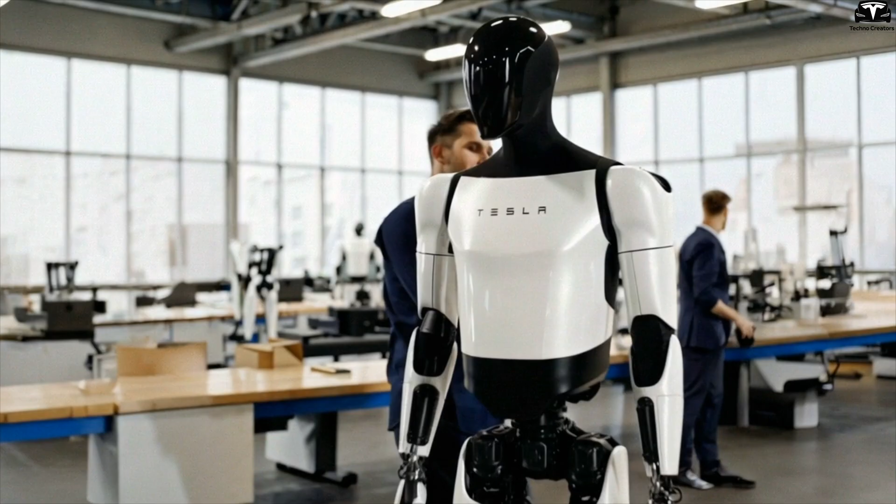Tesla and Elon Musk have just unveiled a game-changing upgrade for the Optimus robot, one so powerful it's forcing the world to seriously ask, are we getting too close to the line between robots and humans? This is no longer a joke. Optimus has evolved into what Elon Musk calls the biggest product in human history. But the real question is, are we ready for what it brings?

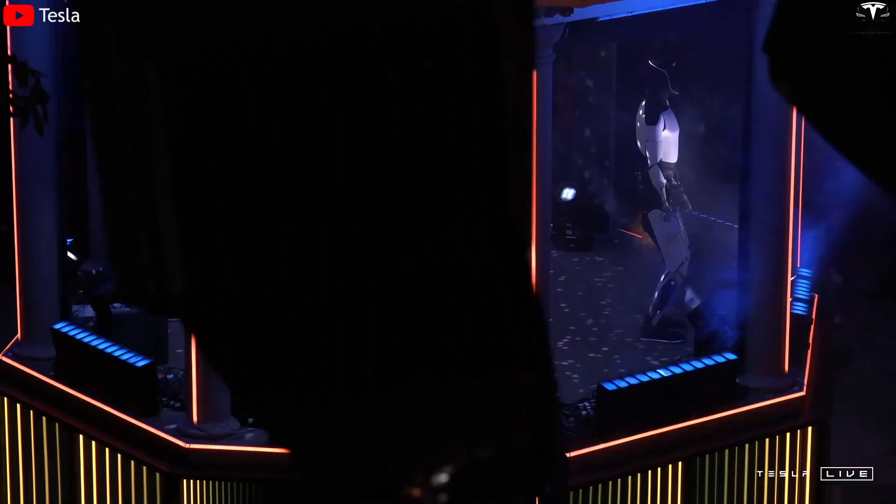Why is Tesla selling the Optimus bot to its employees first? 'We will offer Optimus robots first to Tesla employees. There are some pluses and minuses to that, because it's probably have a few bugs, but it's going to be very cool.'

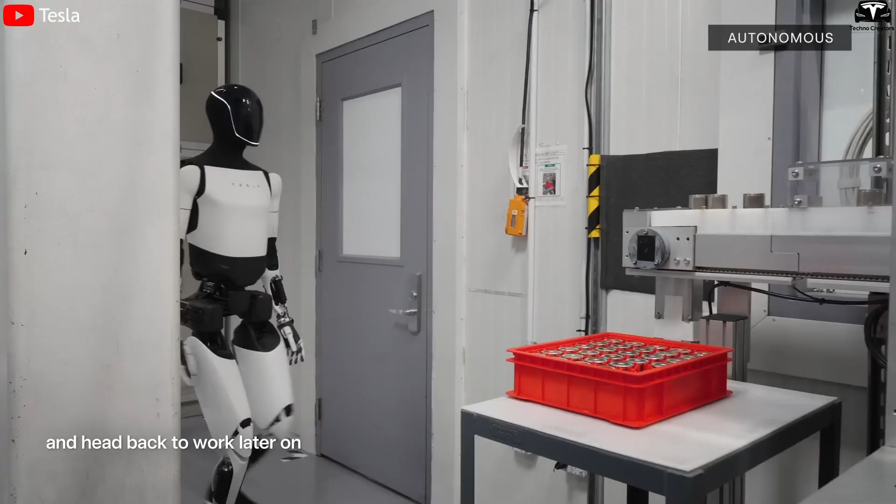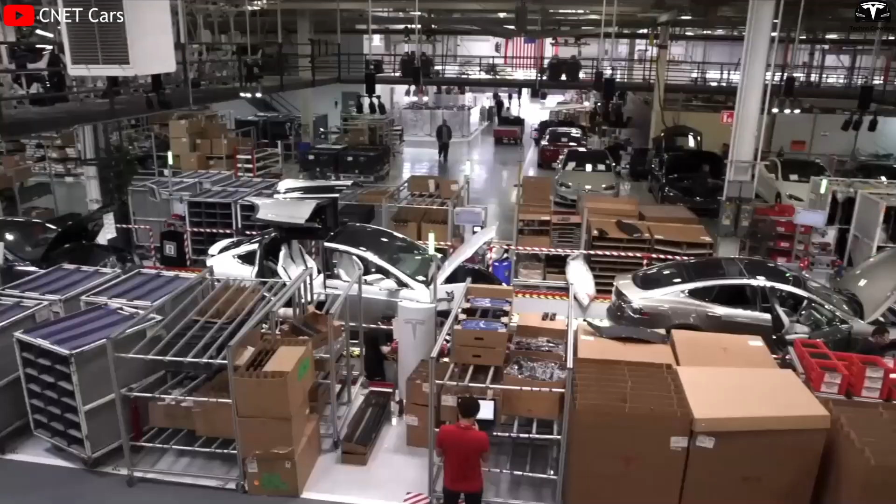Elon Musk has stated that Tesla employees will be the first to use the Optimus robot. One day, these robots could function much like R2-D2 and C-3PO in Star Wars. It is easy to understand why Tesla is prioritizing internal deployment. The goal is not only to test the product in real-world working conditions that no laboratory can fully replicate, but also to accelerate its learning curve in a highly dynamic environment. At the Fremont factory, where over 20,000 workers perform thousands of repetitive tasks every shift, Optimus has a valuable opportunity to observe, learn, and adapt.

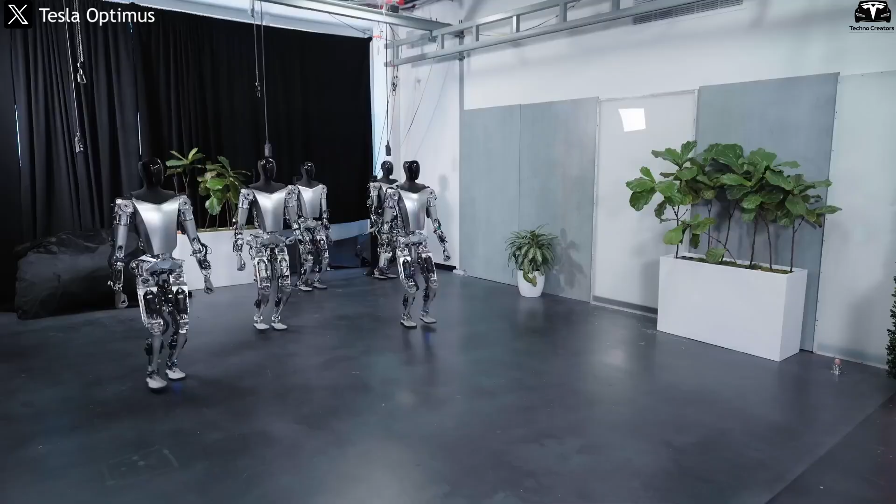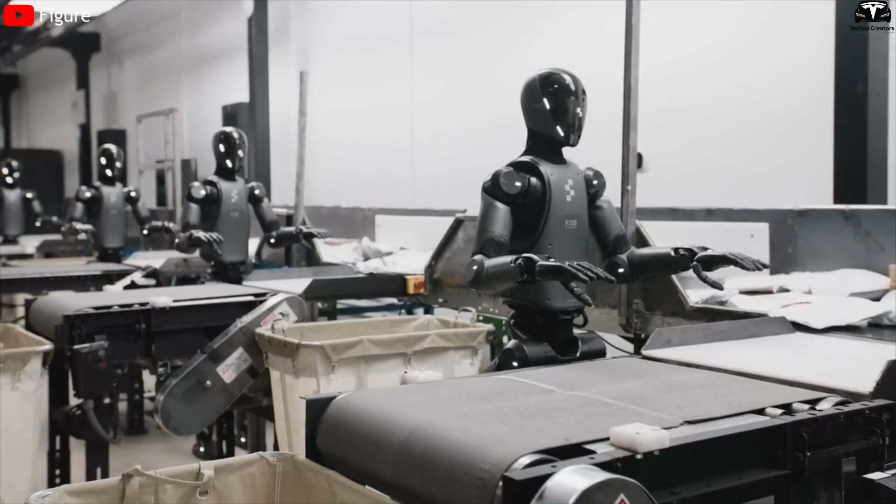During Investor Day 2023, Elon Musk confirmed, 'We have Optimus robots working inside our factories doing tasks fully autonomously.' Two Optimus units have been assigned to handle parts transportation, sorting, and packaging. These are tasks that require coordination between computer vision, navigation, and object manipulation. Deploying the robots across different scenarios within the factory also allows Tesla to gather rich and diverse operational data to better evaluate the robot's performance and limitations. This level of real-world deployment is something that few robotics companies have achieved, including Figure AI and Boston Dynamics, whose robots are still mostly in the demonstration or supervised testing stages.

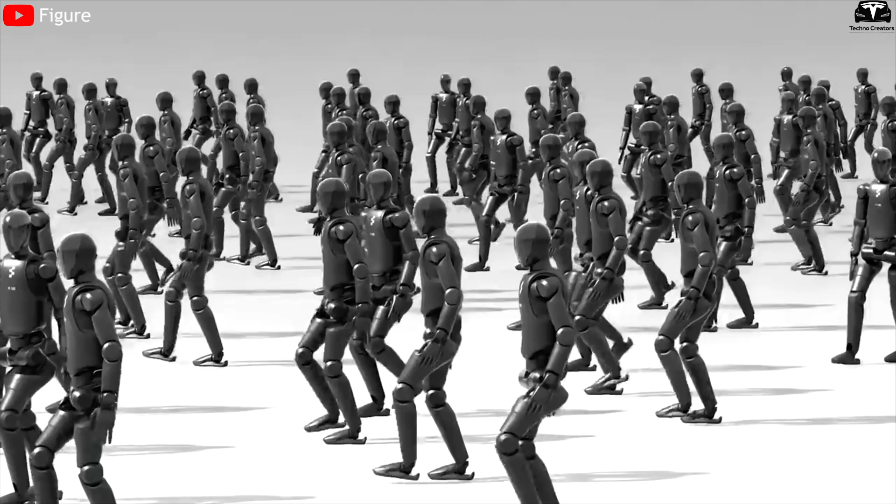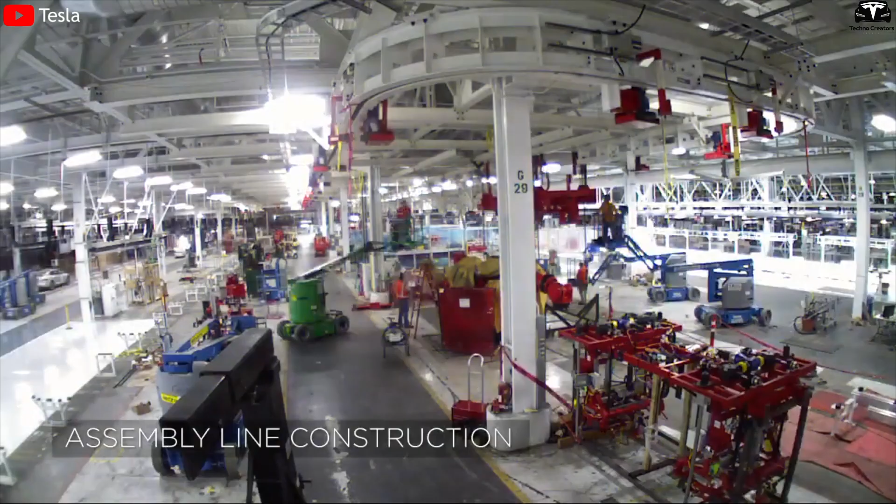Tesla's long-term ambition goes beyond building a humanoid robot. The company aims to establish a fully automated production line where robots can build other robots. As Musk has stated, our goal is to produce millions of units, and eventually the price will be less than $20,000. If one robot can replace a human worker whose labor costs average $30,000 to $40,000 per year in Tesla's U.S. factories, and if the internal manufacturing cost of each Optimus can be brought down below $20,000, the robot could achieve return on investment in just 6 to 8 months. This presents an almost ideal ROI model for manufacturing, especially if production scales up to hundreds of thousands of units per year as Tesla envisions.

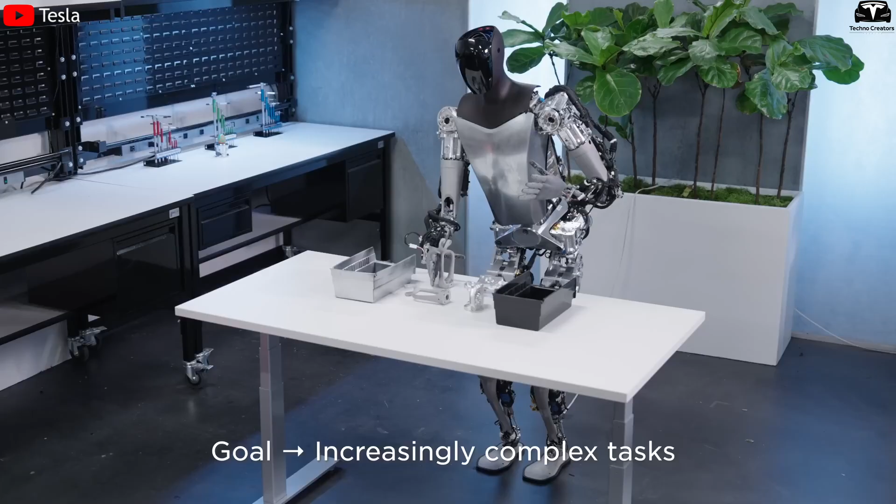Internal testing also helps Tesla fine-tune maintenance costs and component durability, enabling iterative design improvements to maximize long-term reliability and performance. Musk is also smart enough not to rush the product to market. Instead of a mass-market launch, Tesla is allowing employees, many of whom are software engineers, AI specialists, or operations managers, to use Optimus first. This provides Tesla with highly detailed real-world feedback from technically savvy users. These employees will use the robot daily in their work, offering insights into task accuracy, environmental response, and user interaction. It is also a chance to test human-robot collaboration, including gesture and voice commands, as well as unexpected situations such as pathway obstructions, falling objects, or sudden changes in workflow.

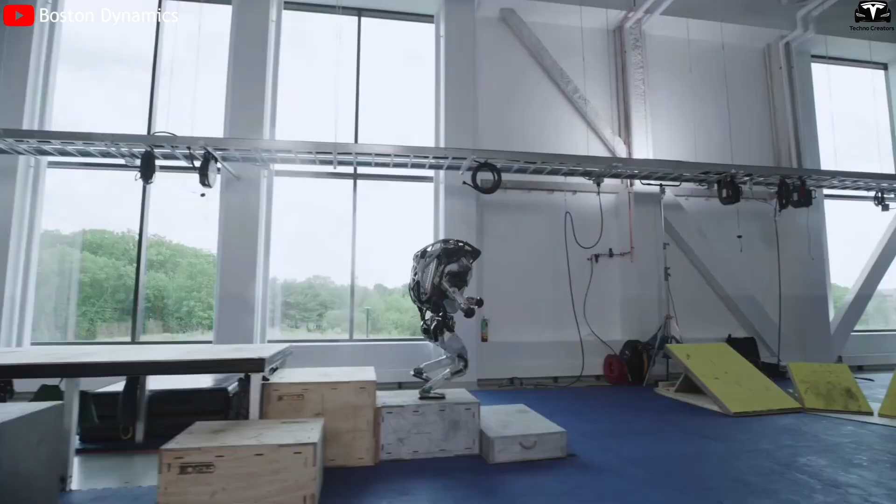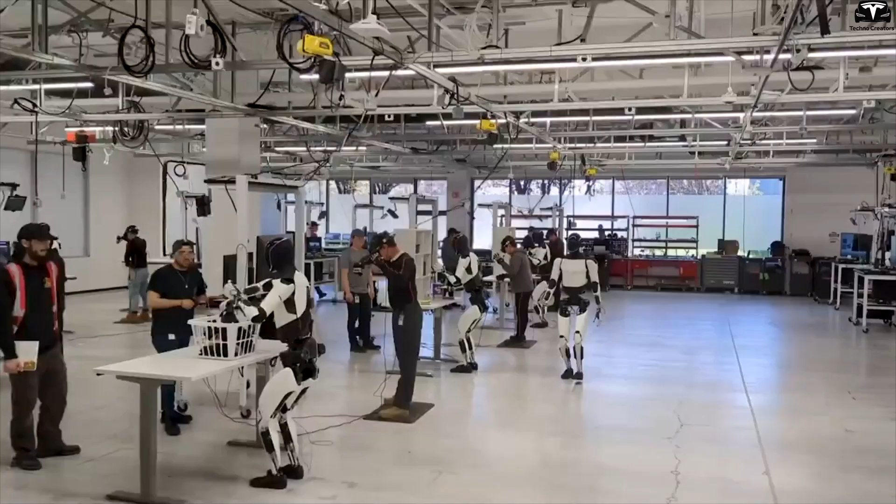Humanoid robots come with inherent risks such as falls, collisions, and software bugs. Any of these issues could trigger public backlash or lawsuits. Tesla has faced criticism for accidents involving autopilot and is understandably cautious about repeating those mistakes with Optimus. Keeping usage internal allows the company to closely monitor and manage any incidents, issue software updates, and even recall units if needed. It also lets Tesla trial unfinished or experimental features without exposing them to the public. As Musk noted too, testing in the real world is critical, but it has to be safe and controlled. Limiting trials to internal use is the safest way to contain risks while maintaining the freedom to iterate quickly and discreetly.

A major reason internal testing is critical is to refine safety protocols for human-robot collaboration. Optimus will be assigned repetitive or hazardous tasks, such as lifting heavy loads or operating in toxic environments. In a controlled factory setting, Tesla can adjust key safety features like force limits, proximity detection, and emergency stop sensors. These safeguards are essential for public deployment, where safety standards are even stricter.

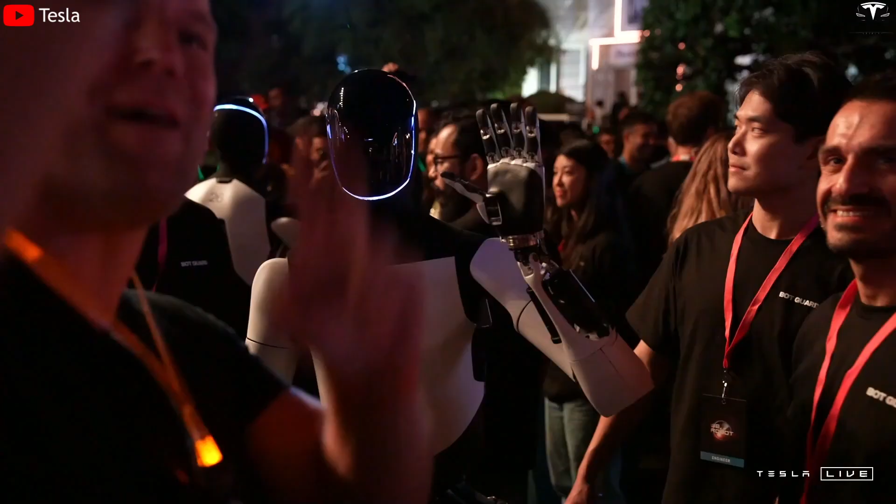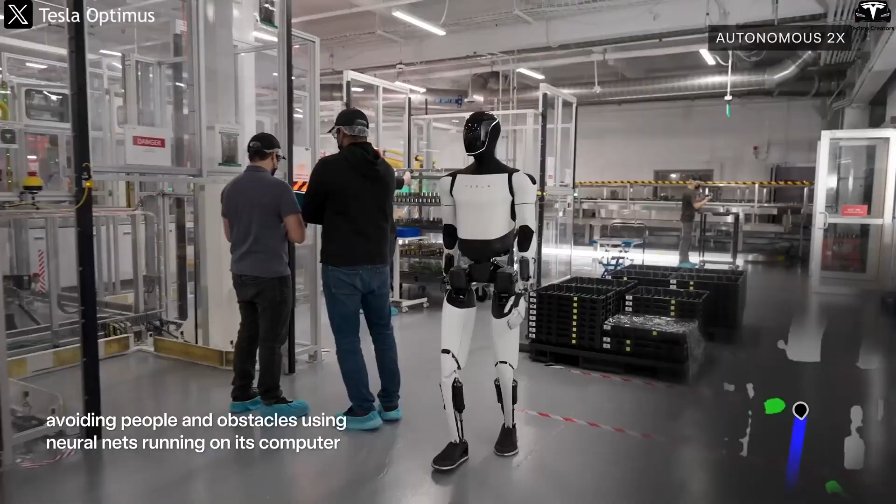Allowing Tesla employees to work alongside Optimus also carries long-term strategic value. It helps train humans to interact with robots and allows Tesla to improve user interfaces, develop more intuitive command systems, and determine whether the robot fits into the existing workflow. If successful, this will pave the way for broader deployment across Tesla's global production lines and eventually for use by other companies. Tesla also needs to prove that Optimus can operate reliably for thousands of hours, which is the expected lifespan of an industrial machine.

Continuous operation in a factory environment, such as 8 to 12 hours a day for 6 to 7 days a week, will reveal limitations in hardware, software, thermal management, and other design vulnerabilities. This feedback is invaluable for improving materials, optimizing component choices, and preparing for full-scale production.

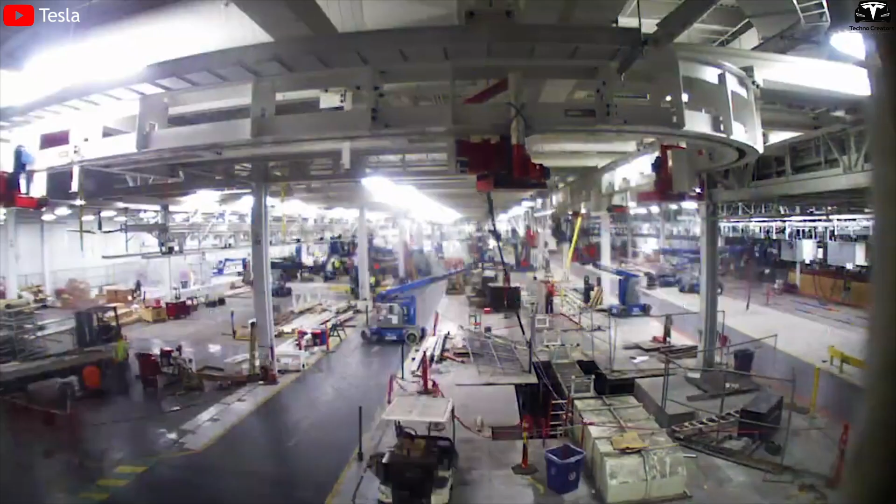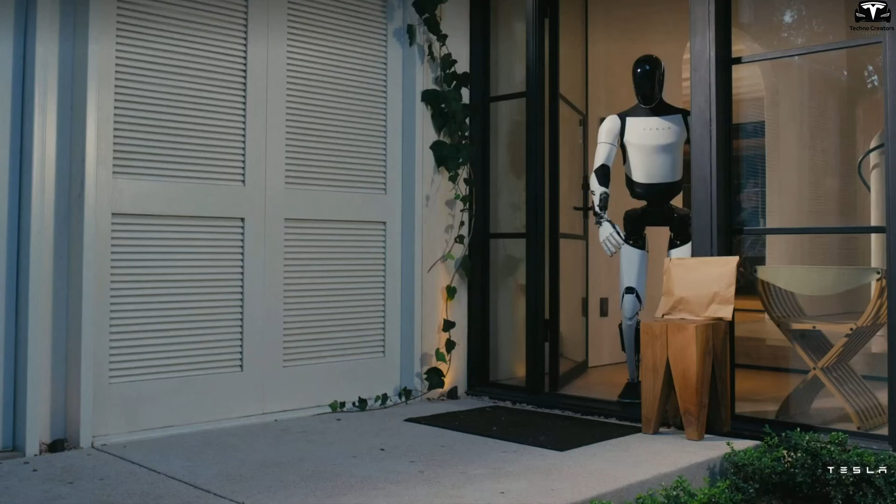Tesla is well known for using controlled scarcity to drive media buzz. Allowing employees to use or even own Optimus creates organic visibility. Robots will appear in offices, factories, or casually show up in social media videos.

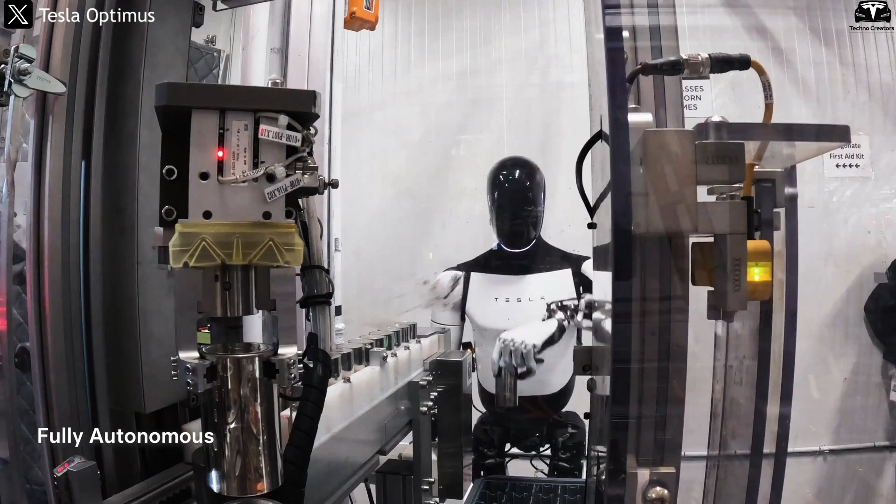This mirrors the successful rollout of Cybertruck, where leaked footage of prototypes on public roads generated massive online traction. Once Optimus is seen performing real work inside Tesla, it will help validate the product's feasibility and inspire confidence among potential buyers. Building a community of internal early users also creates a powerful form of authentic marketing through real people using real products in real environments.

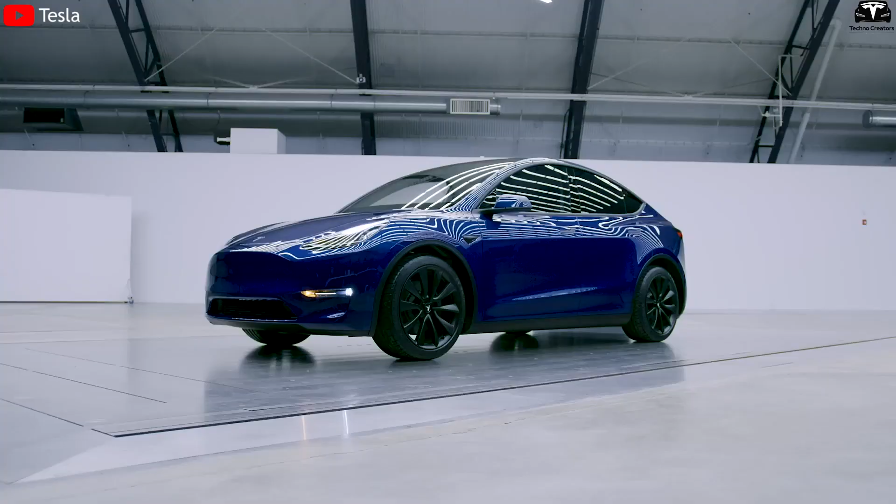In addition to the Cybercab, Tesla's Optimus Bot is expected to play a critical role in the production lines of other high-volume vehicles, such as the Model 2, Model Y, and Cybertruck, all of which involve numerous labor-intensive assembly tasks. Tesla plans to produce at least 5 million units of the Model 2 annually starting in 2027, and that number could grow if global demand continues to rise.

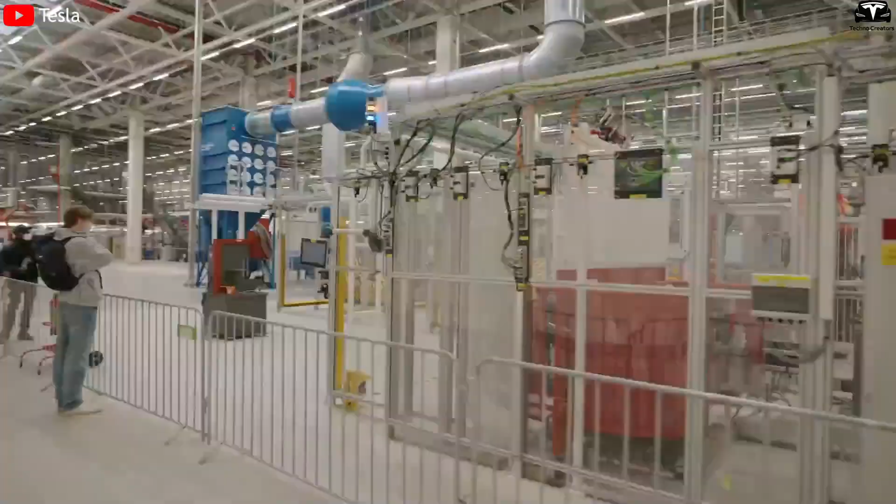Under current automation levels, many steps in the assembly process, such as circuit board mounting, cable inspection, windshield installation, and component sorting, still require tens of thousands of manual laborers.

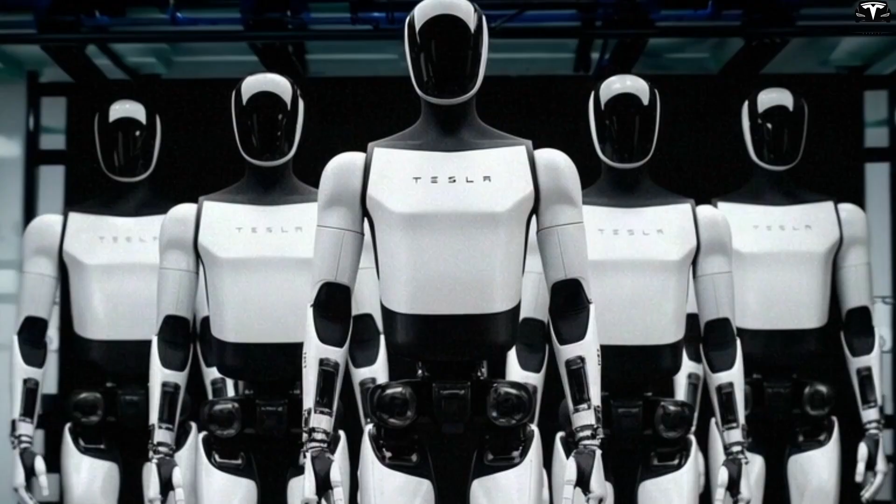Elon Musk has stated that the goal is to deploy hundreds of thousands of Optimus robots across Tesla's global gigafactory network by 2030, beginning with over 1,000 internally built units by the end of 2025. If each Optimus robot can replace 2 to 3 shifts of labor, equivalent to around 6 to 9 human workers per day, then just 10,000 robots could offset millions of labor hours per year.

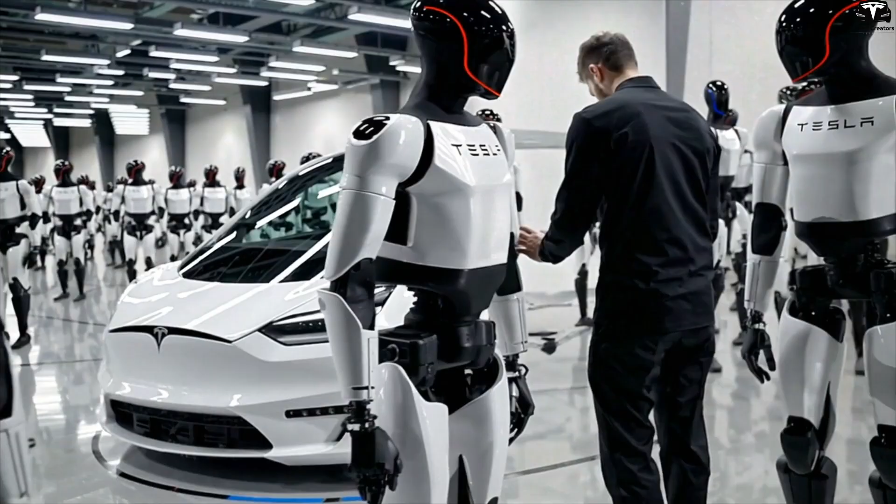It's estimated that a large-scale rollout of Optimus could save Tesla $2 to $3 billion in annual labor costs, while significantly boosting profit margins, a crucial factor as the company aims to cut vehicle prices to just 50% of today's Model 3. In an ideal scenario, by 2032, Optimus could be responsible for 30 to 40% of all production work across Tesla's factories.

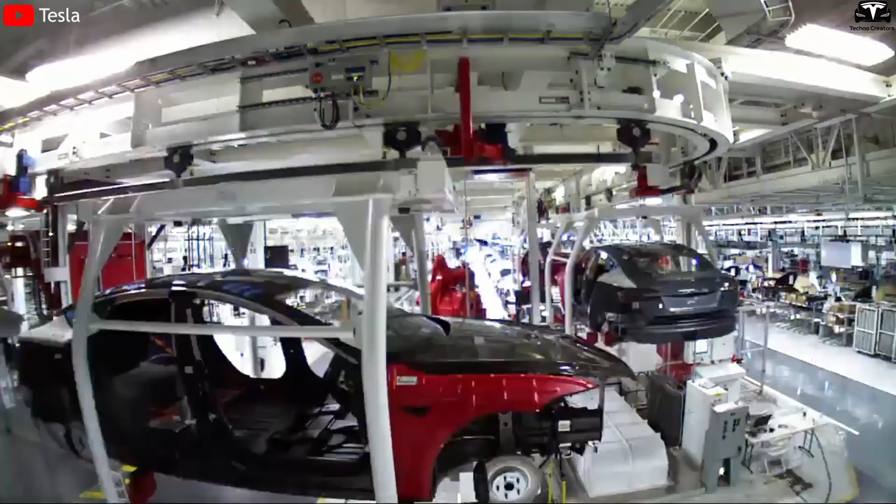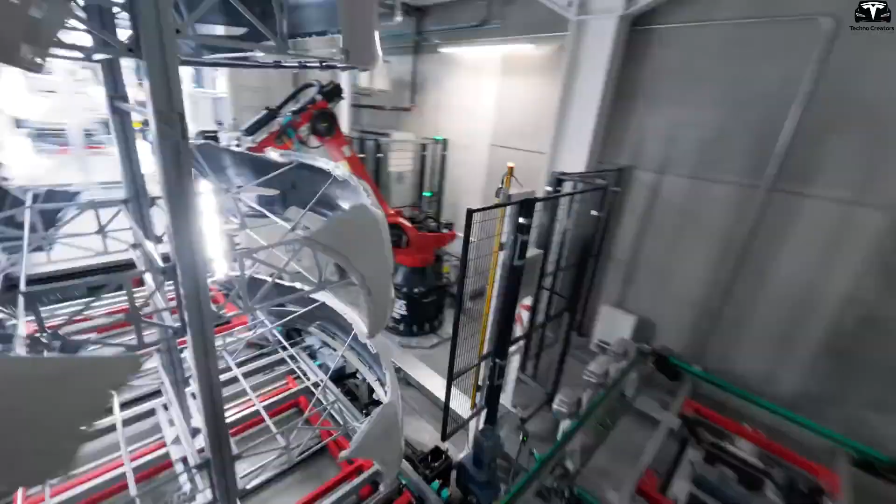How close is Tesla to mass-producing an army of Optimus bots? Tesla is significantly accelerating the development program of its humanoid robot Optimus, with an internal goal of producing 10,000 units as early as 2025. This is a clear indication that the company is making a major bet on scaling its robotics product line. Although Elon Musk acknowledges this is an ambitious target, even delivering a few thousand units would mark a groundbreaking milestone.

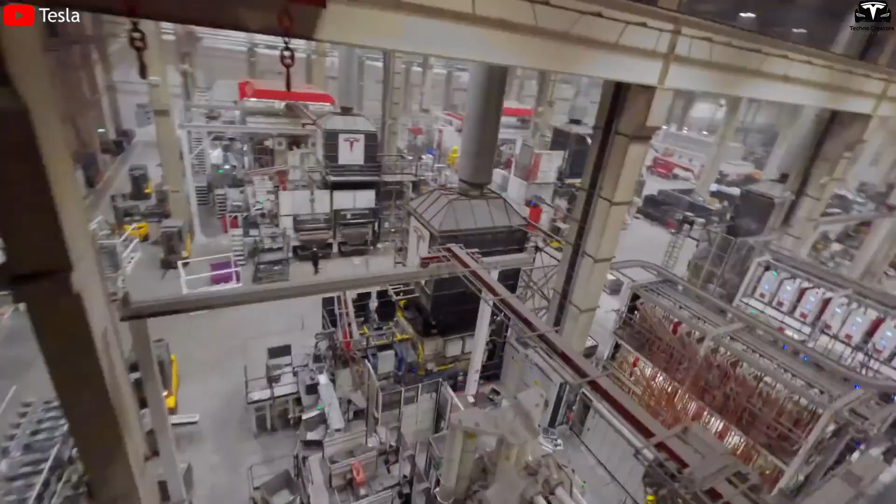Currently, the Fremont factory is being prepared for limited-scale production, with the first batch of around 1,000 robots expected to be built in Q2 2025, followed by a rapid ramp-up to 10,000 units by year-end. This phased approach closely mirrors the strategy Tesla used in the automotive sector, where production bottlenecks are resolved step by step to enable exponential growth.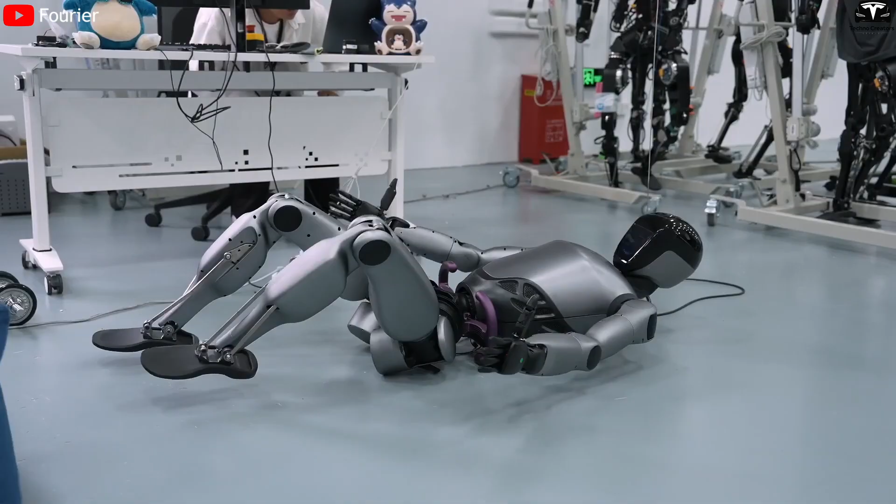Despite facing fierce competition from China, where companies like Fourier Intelligence, UBTech, and Xiaomi Robotics are rapidly developing humanoid robots with strong government support, Tesla Optimus still holds the potential to dominate the projected $10 trillion robotics market.

This growth potential stems from Tesla's superior vertical integration across system design, actuator manufacturing, battery technology, and AI training, all developed in-house. Optimus even shares multiple core technologies with Tesla's self-driving vehicles, such as sensors and processing chips, significantly lowering component costs.

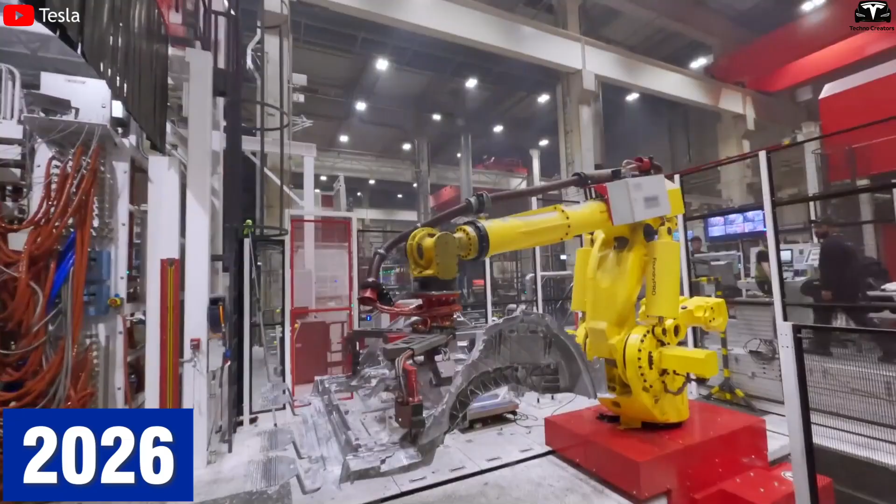Elon Musk has confirmed that Optimus's Gen 3 production line is being designed to reach a capacity of up to 100,000 robots per month by 2026, showing strong confidence in the long-term viability of the humanoid robot market. What's particularly notable is that, unlike many of Tesla's previous projects such as the delayed Tesla Roadster, the Optimus program is progressing at a pace that far exceeds expectations.

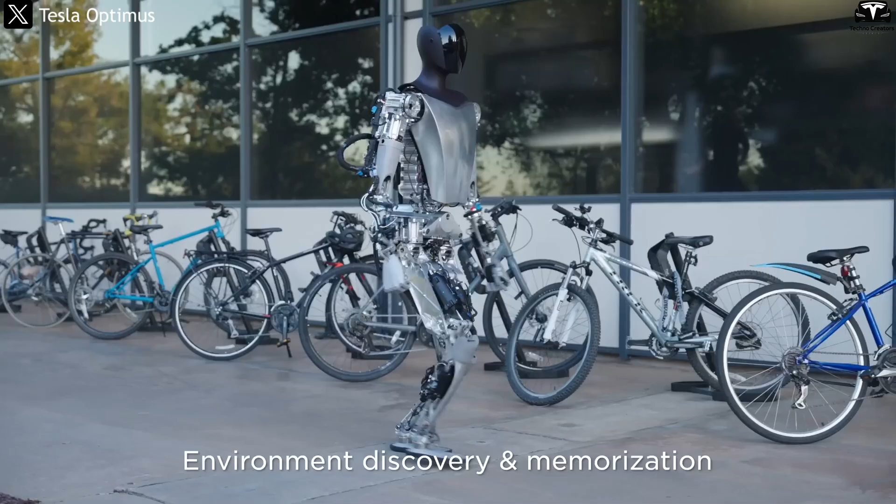This is largely due to the fact that Optimus does not require an entirely new supply chain. Instead, it benefits from existing partnerships in semiconductors and battery cells, along with factory systems already restructured for Cybertruck production. Tesla is now actively testing Optimus prototypes at its factories, where the robots are performing basic logistical tasks like picking up parts and monitoring production lines.

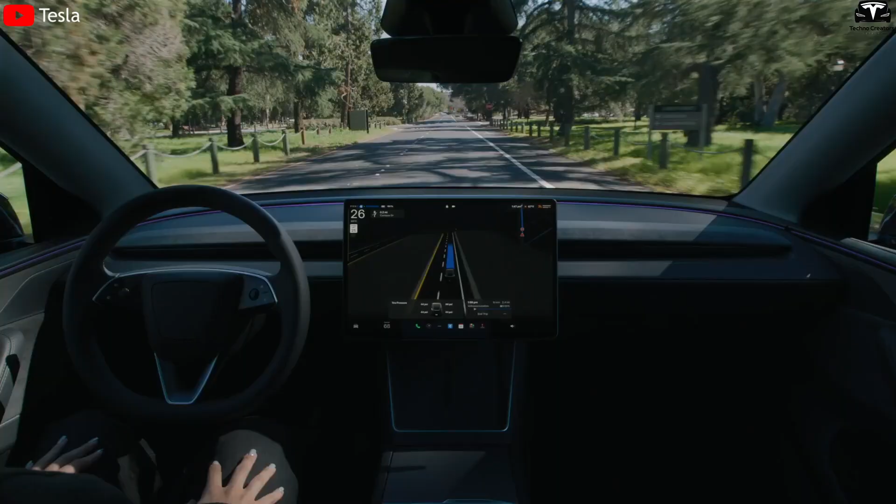Tesla's key advantage lies in its massive real-world dataset collected from over 5 million vehicles on the road. Originally used to train the full self-driving system, this dataset is now being adapted for use in Optimus's navigation and environmental recognition algorithms. This symbiotic relationship between EVs and robotics allows Tesla to shorten development timelines and rapidly enhance Optimus's AI capabilities.

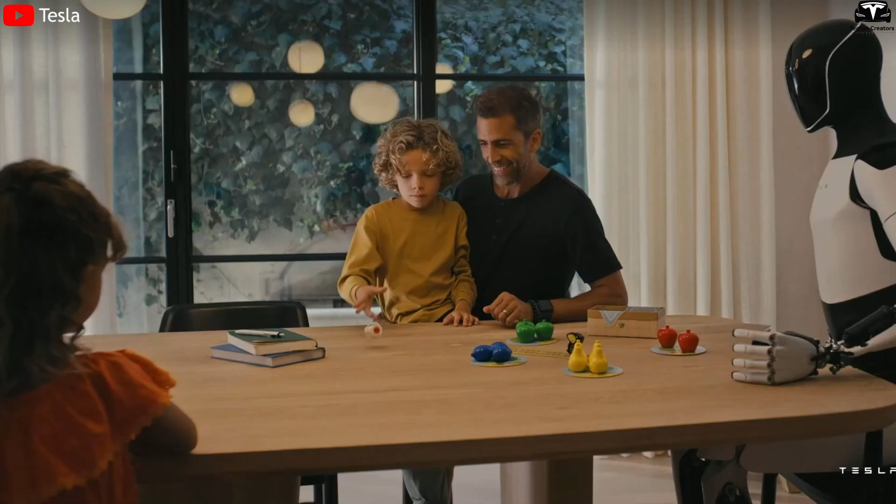Tesla plans to deploy Gen 3 Optimus robots across a wide range of industries, including automating repetitive tasks like parts sorting, quality inspections, patient assistance in healthcare, warehouse organization and retail, and even domestic applications such as cooking, cleaning, and childcare. These use cases are now entering their final testing phase before mass production and market launch in 2025.

Tesla has even outlined plans to use Optimus for constructing habitats on Mars, with a variant built with sealed joints and radiation-hardened electronics developed by SpaceX.

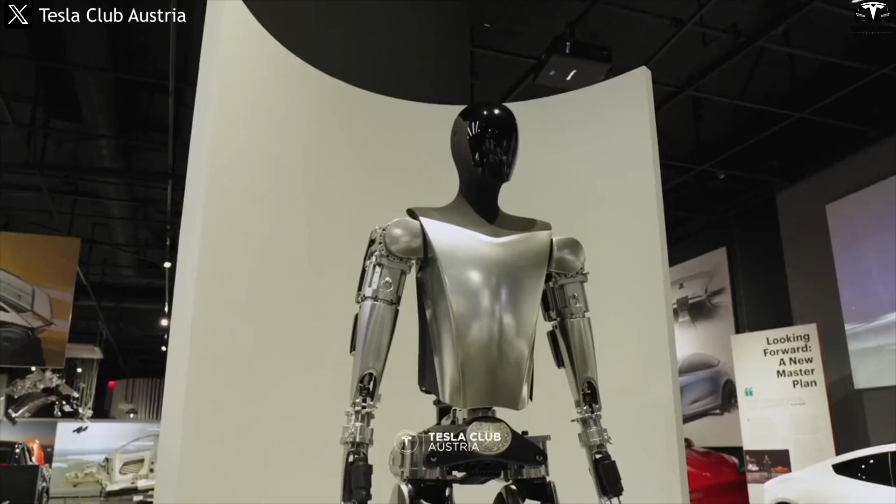While there are no clear signs that Optimus will be available for general consumer purchase in the short term, nearly 1,000 robots have already been deployed at Tesla factories to assist with production and data collection. This number is expected to grow rapidly. Elon Musk believes the robot-to-human ratio on factory floors could reach at least 3-to-1 or even 5-to-1, meaning 3 to 5 robots assisting every human worker.

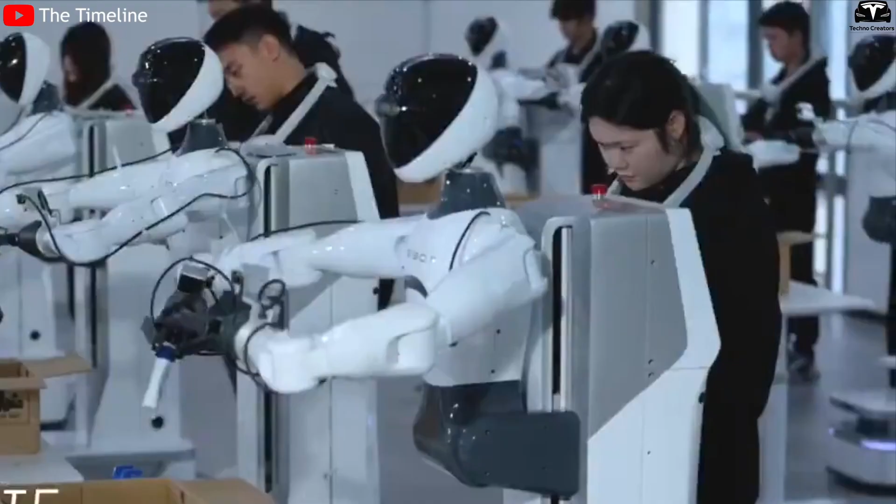In his boldest forecast, Musk has suggested that Tesla could eventually produce up to 100 million Optimus units per year, with the expectation that robotics could become the company's main revenue stream.

While that figure may seem far-fetched, it is economically plausible. If Tesla reaches a production rate of 1 million Optimus units annually and maintains a retail price of around $20,000 per unit, it could generate $20 billion in yearly revenue.

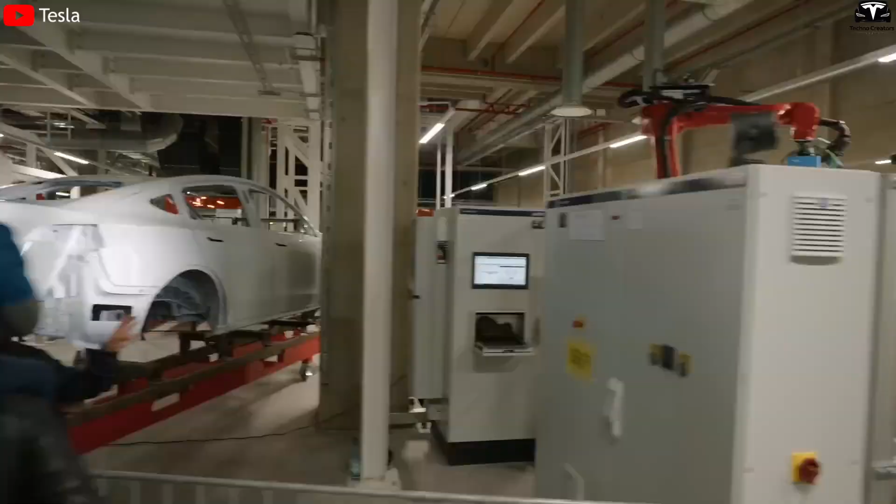More importantly, if Tesla succeeds in lowering the production cost to just $10,000 per robot, thanks to economies of scale and integrated manufacturing, Optimus could be sold to the mass market for as little as $19,999.

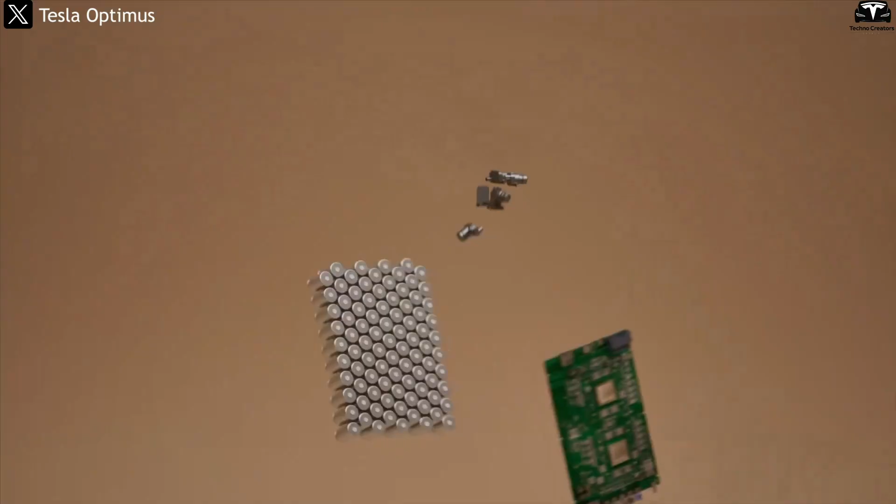Why does Elon Musk see Optimus as an immediate need? Elon Musk views the development of Optimus as an immediate necessity for Tesla, primarily to address the challenges in scaling efficient and consistent labor within its manufacturing operations.

This is especially critical as Tesla gears up for the mass production of the upcoming Cybercab, aiming for an annual output of 2 million units by 2026.

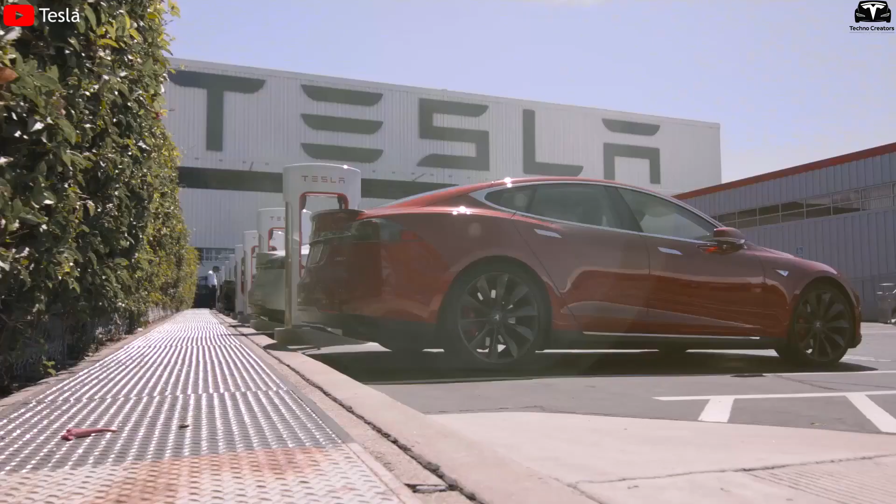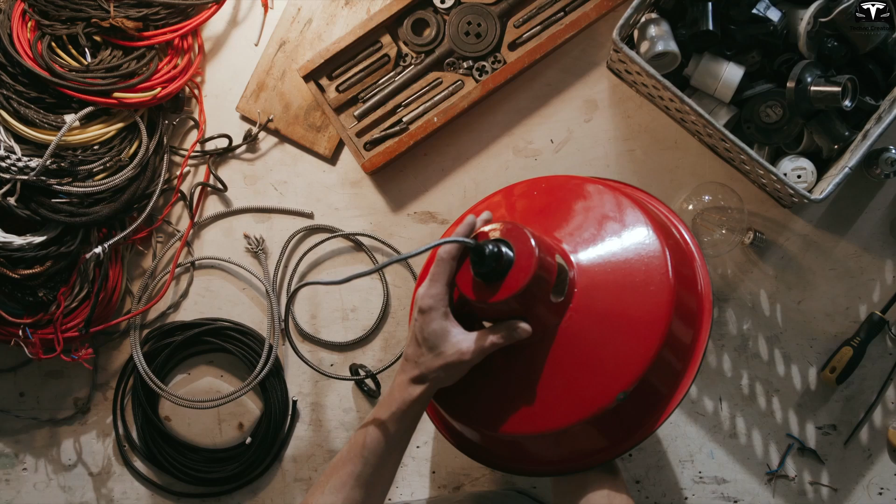Musk has highlighted that many tasks within Tesla's gigafactories are surprisingly difficult to automate. For instance, during an interview with Marques Brownlee, he noted that simple tasks like connecting 2 cables, which take a human a second or two, are disproportionately challenging and costly to replicate with conventional automation.

I mean, I think we'll be making tens of millions of robots a year type of thing. It's like serious volume. Maybe 100 million robots a year.

Elon Musk is preparing to launch an unprecedented robotics company. This ambition, aiming to produce up to 100 million humanoid robots annually, 10 times Tesla's current global car production, signals a bold step towards a robotic industrial revolution.

What is Elon Musk's plan for the new robotics company?

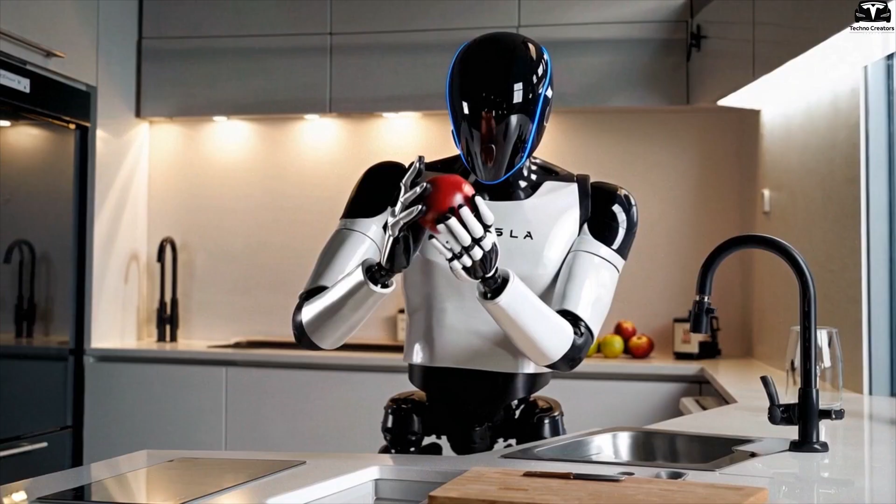Why is Optimus more important than electric cars? Currently, Tesla is still considered an electric car manufacturer, but that definition won't last long. Tesla is transforming into a technology company, and soon enough, into a robot company.

Why is that? Because Optimus could be Tesla's most valuable product. Elon has even said that it could be worth more than all of Tesla's other products combined. This is a super big deal.

My prediction on this front is that Optimus will be the biggest product of all time by far. Nothing will even be close. I think it'll be 10 times bigger than the next biggest product ever made.

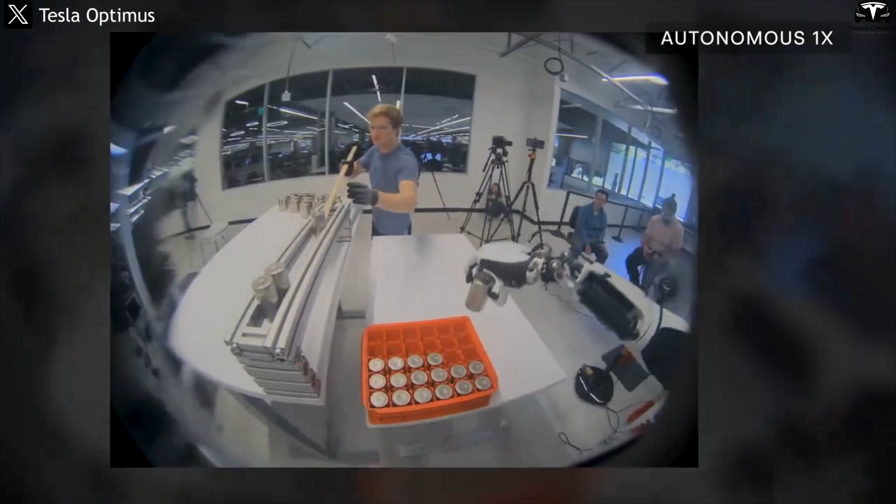We think in the long term with Optimus and self-driving cars, Tesla could well be the most valuable company in the world. Of course, the Tesla bot and even Elon Musk himself are really just holding the lock. The customers are the ones holding the key.

If Optimus isn't smart enough or capable enough to actually help people, then that $20,000 price tag is just for an expensive toy that can move around. No one's going to pay for it.

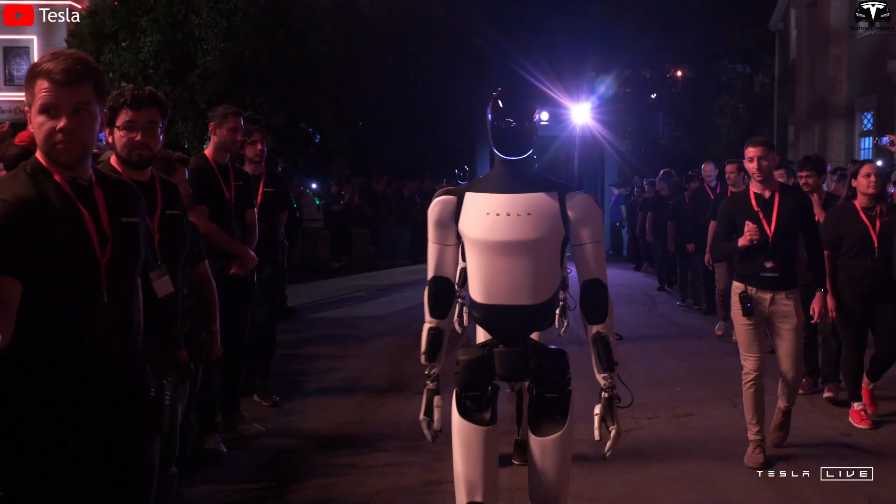But if the opposite happens, if the Tesla bot really does have a breakthrough brain, the kind that Elon Musk confidently calls a real brain that's superior to anything else out there, then the story completely changes. People will be lining up to get one when its usefulness starts to translate into real money.

You'll drop $20,000 up front, but you'll never have to hire a store clerk, tutor, or cleaning lady again. Suddenly, Optimus isn't just an expensive toy, but a money-printing machine. And yeah, if you like making money, you've got to have an Optimus. Because I think everyone, of the 8 billion people on Earth, everyone's going to want their Optimus buddy.

Optimus possesses an exceptional ability to learn rapidly, enabling it to store and apply data from the very first execution of a task. For instance, in cooking, while humans need to practice and memorize steps multiple times, Optimus can remember and apply a recipe immediately without the need for recall.

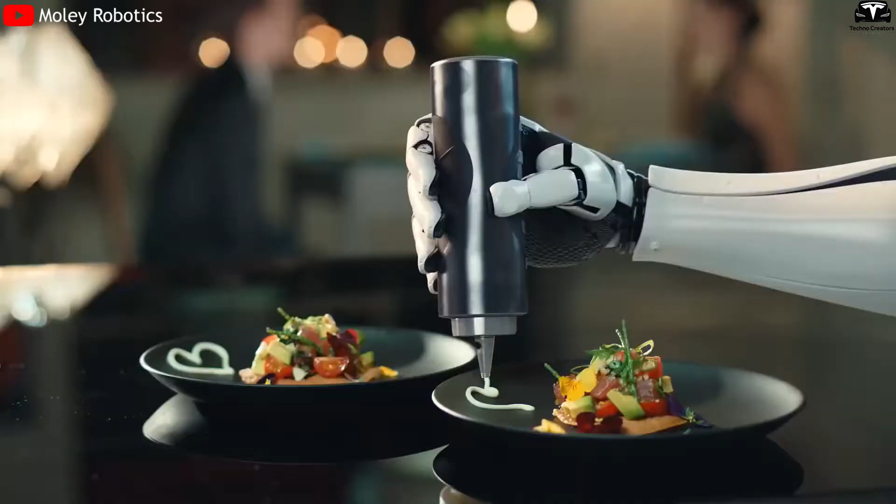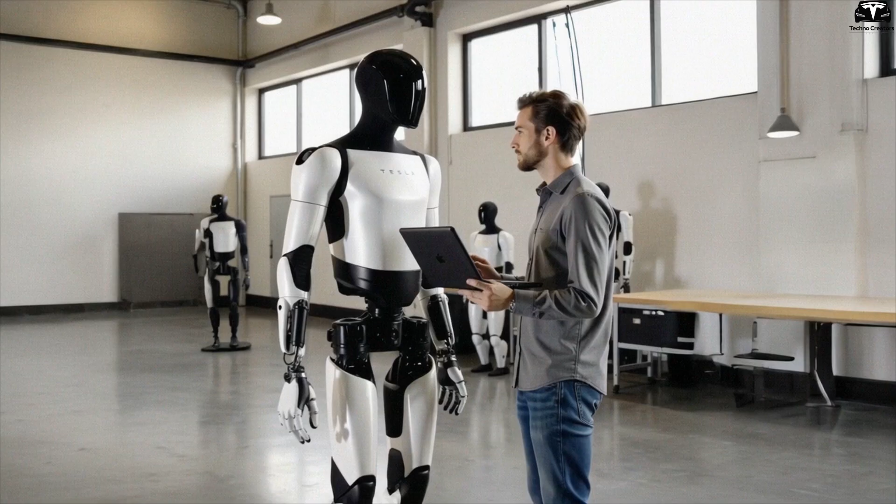This capability is powered by Tesla's advanced AI technologies, including machine learning and deep learning, allowing Optimus to autonomously optimize its actions. Elon Musk has expressed confidence that Optimus can learn new tasks simply by watching videos, enabling the robot to acquire new skills without requiring retraining after purchase.

This provides a significant advantage to users, as they don't need to teach the robot anew for each task, a process that can be time-consuming with other robots.

Our next generation has 22 degrees of freedom. It will be able to play the piano.

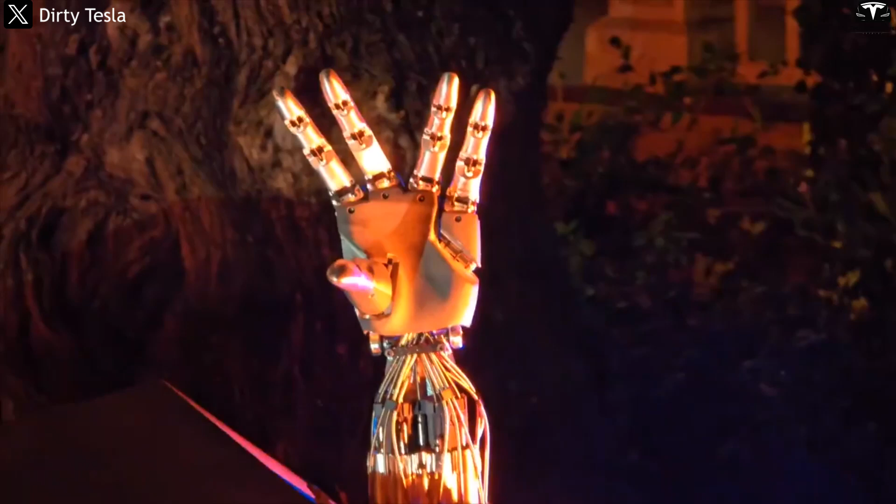So it's really like, wow. This is because Optimus's hand features 22 degrees of freedom, allowing the robot to perform delicate and complex manipulations similar to a human hand. With only 5 fewer degrees of freedom than the human hand, which has 27, Optimus can execute tasks requiring fine motor skills, such as picking up objects, turning knobs, grasping items, and performing intricate operations that many other robots are currently unable to achieve. This advanced dexterity brings Optimus closer to human-like functionality in various applications.

And your dexterity is actually better if your fingers are of different length. There's a reason we've got a little finger. Like, why not have a little finger that's bigger? Because it helps you with fine motor skills.

What sets Optimus apart is that it's not merely a conventional automation robot. It's designed as an intelligent assistant to help with daily human tasks. Optimus can perform household chores, care for the elderly, walk dogs, and even tutor children. This reflects Elon Musk's vision of transforming Tesla from solely an electric vehicle company into a robotics enterprise, where Optimus serves as a helpful assistant, liberating humans from manual labor and creating new opportunities in automation.

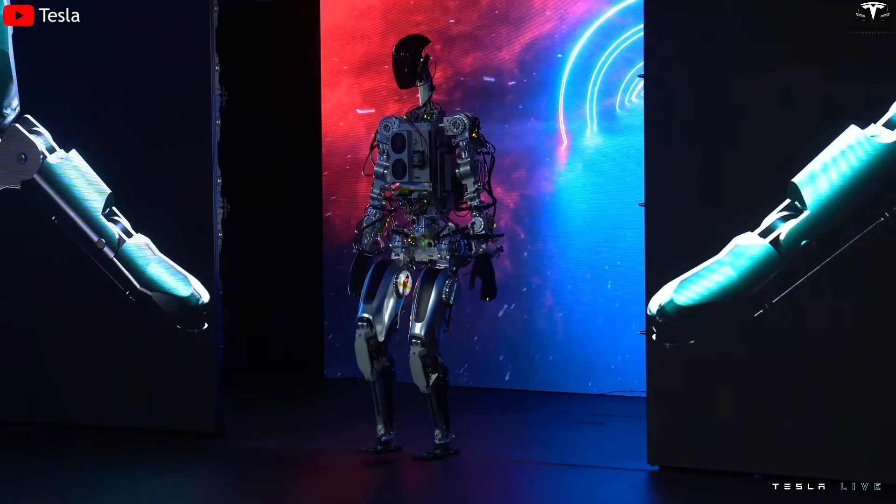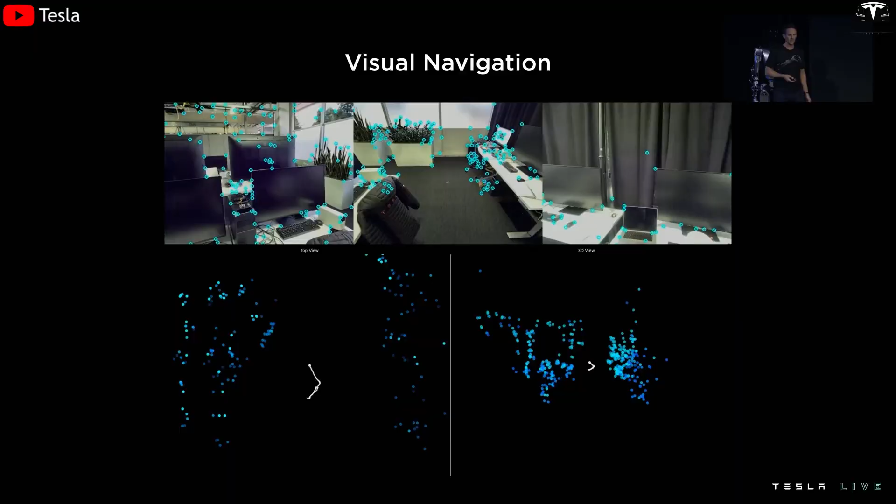Although Optimus initially exhibited somewhat unsteady movements, recent updates have significantly enhanced its mobility, resulting in straighter walking and reduced wobbling. Each step Optimus takes is governed by an AI neural network, allowing the robot to adjust its gait based on the terrain, much like humans do when navigating uneven surfaces. This not only demonstrates the intelligence of its AI, but also indicates that Optimus can operate in complex and challenging environments, a feat that many other robots have yet to achieve.

Optimus, I think, is a literally $25 trillion market cap situation.

Recognizing the immense profit potential, Elon Musk, known for pursuing groundbreaking opportunities, is fully committed to realizing Optimus Gen 3. He predicts that Optimus could generate over $10 trillion in long-term revenue, surpassing Tesla's current automotive business. Tesla aims to produce 10,000 to 12,000 robots in 2025 and scale up to 1 million units annually by 2027.

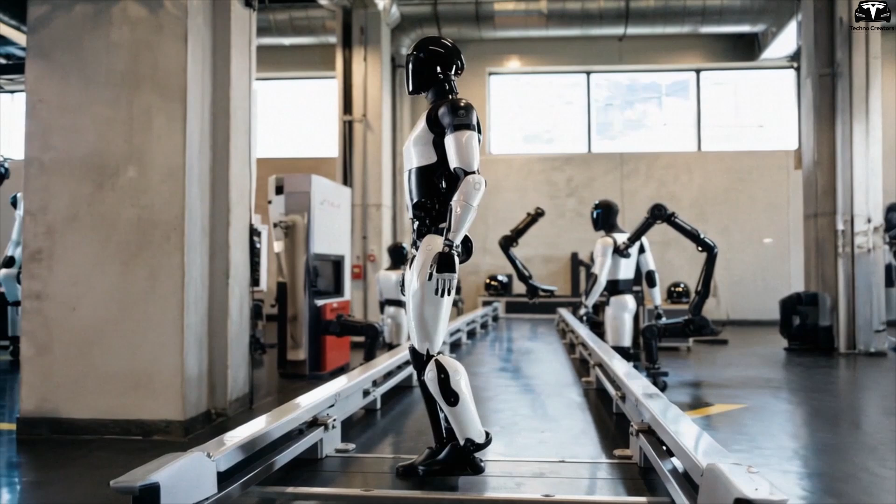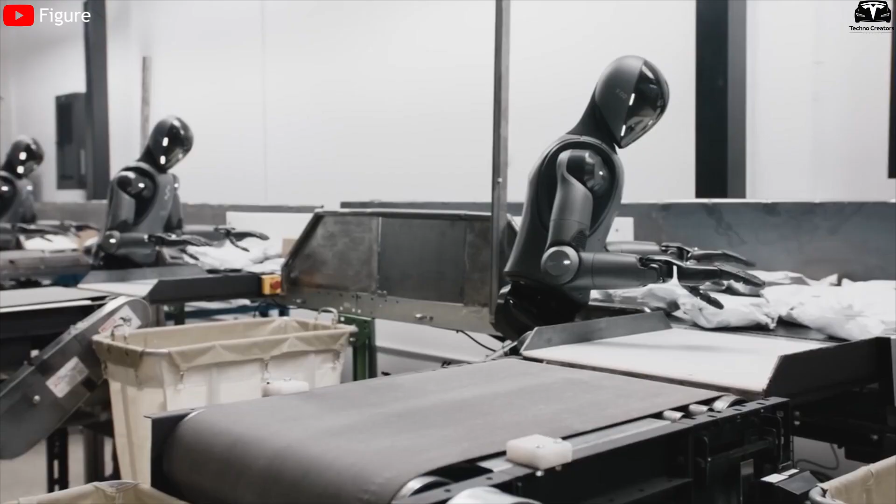Thank you. How is Tesla becoming a robotics company? Optimus is not merely a robotic product. It represents a strategic turning point that could reshape Tesla's entire future. While electric vehicles have laid the foundation for Tesla to become the world's most valuable automaker, Optimus holds the potential to unlock a market many times larger, the humanoid robot market, capable of replacing a significant portion of manual labor in factories, logistics, services, and even daily life.

Elon Musk has repeatedly emphasized that Optimus will surpass electric vehicles in importance. He stated, 'Optimus will ultimately be worth more than the car business, worth more than FSD.' This is not an extravagant claim, but reflects Musk's confidence in the robot's potential, as Tesla is targeting a $10 trillion market, larger than the entire global automotive industry combined. While the electric vehicle sector is projected to reach around 1.5 to 2 trillion by 2030, the humanoid robot market could expand into various fields, including industry, healthcare, agriculture, and home applications.

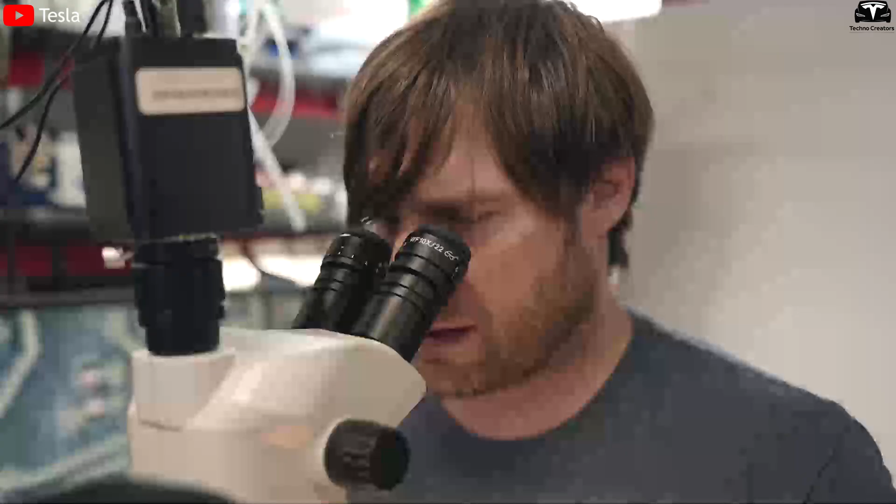Unlike electric vehicles, Optimus can be mass-produced at a much lower cost. Elon Musk once shared that Optimus could be sold for under $20,000, cheaper than a standard sedan, thanks to the reuse of core electric vehicle technologies such as battery systems, electric motors, FSD chips, and cameras—technologies Tesla has developed over more than a decade. This not only helps Tesla optimize costs, but also makes the robot more accessible and widespread compared to current robotic technologies.

More importantly, Optimus is not a one-time consumer product, but a digital worker, capable of operating 24/7 without rest, strikes, or social welfare needs. Elon Musk has emphasized that, in the future, physical work will be a choice. If Tesla successfully deploys Optimus robots in its gigafactories, it will demonstrate the ability to replace manual labor, reducing production costs and increasing productivity to unprecedented levels.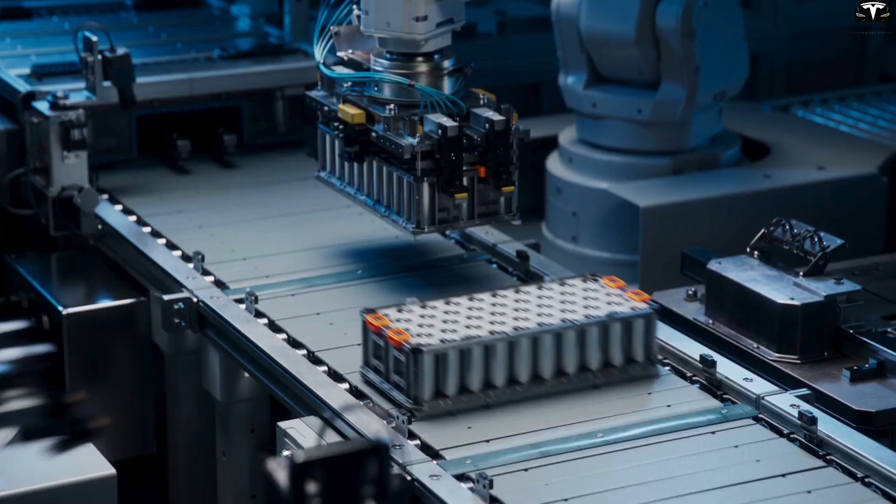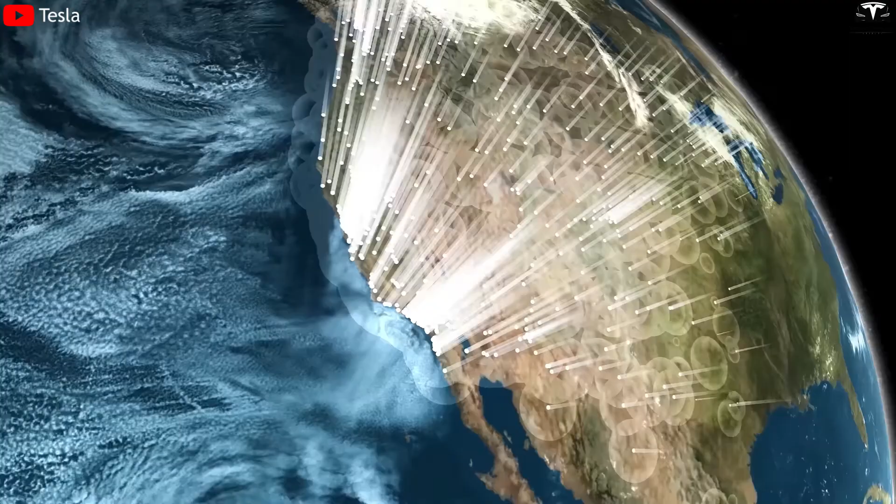A crucial factor making Optimus more significant than electric vehicles is its ability to synchronize global production. While expanding the electric vehicle network depends on charging infrastructure, battery supply chains, and individual country policies, robots can be mass-produced, packaged, shipped, and deployed like electronic devices. This enables Tesla to expand the robot market more rapidly and deeply than electric vehicles, especially in countries with aging populations or severe labor shortages, such as Japan, South Korea, and many European nations.

According to United Nations forecasts, by 2050, the elderly population in developed countries will account for over 25% of the global total, leading to increased demand for automation solutions and elderly care. Optimus can meet this demand, replacing workers in manual labor sectors and assisting the elderly in society. Optimus not only helps Tesla expand globally, but also has the potential to completely transform our understanding of labor economics.

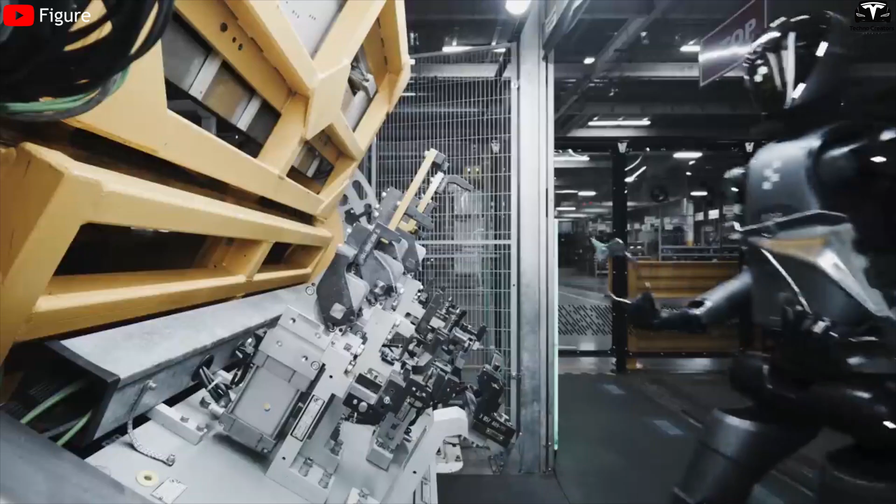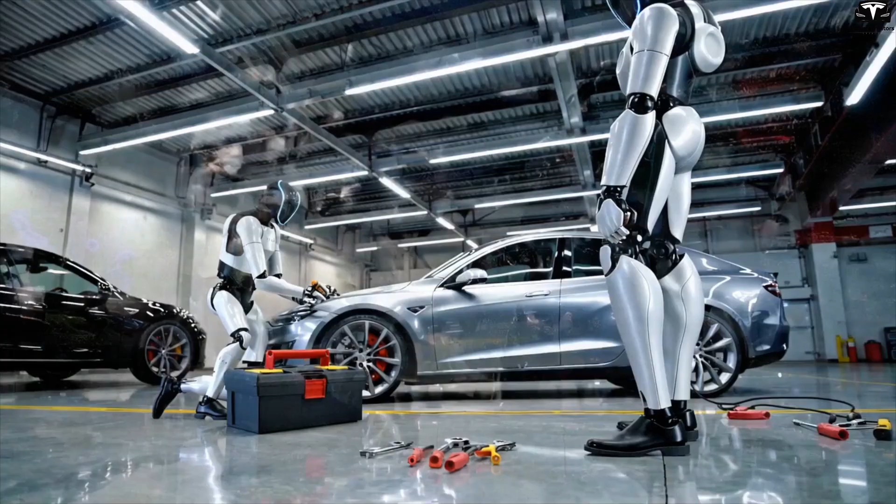According to the World Economic Forum, the adoption of robots and automation could increase global GDP by 15% by 2030. This indicates that Optimus could revolutionize not just the industry but the entire global economy, initiating a labor and production revolution. With this vision, Elon Musk is not only leading Tesla in electric vehicle development, but also expanding into a promising humanoid robot market.

Optimus is more important than electric vehicles, not just because of its enormous financial potential, but also because it represents Tesla's next step from an electric vehicle company to a global robotics technology company. While electric vehicles are a transportation revolution, Optimus could initiate a labor revolution, a fundamental change for human society in the near future. What advantages does Tesla have when making robots?

Tesla possesses several key strategic advantages in developing the Optimus humanoid robot, which not only helps the company expand beyond the automotive industry, but also creates significant opportunities in automation and manual labor replacement. One of Tesla's biggest strengths is its ability to leverage technologies that have been developed for electric vehicles over a long period. Tesla owns a highly efficient battery system, electric motor, and AI technologies, which not only help optimize costs, but also enable the Optimus robot to operate efficiently with low production costs.

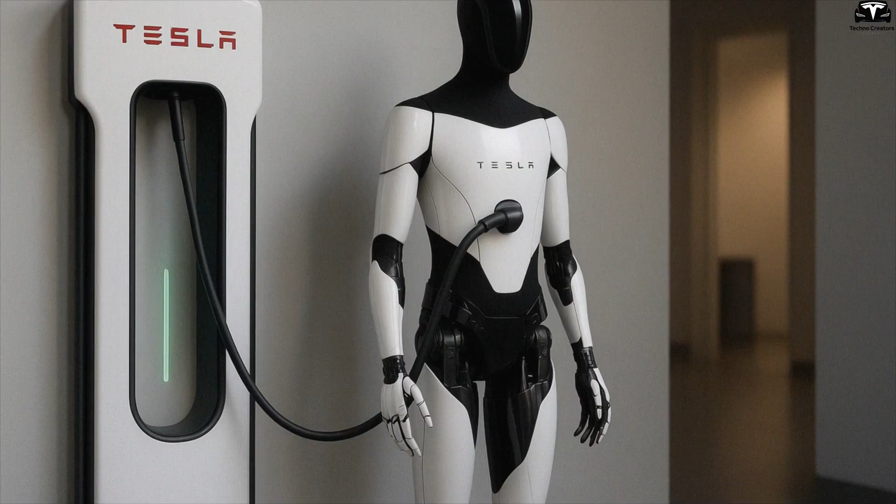Elon Musk has shared that Optimus will use Tesla's electric vehicle batteries, helping the robot operate for extended periods and save energy. Additionally, Tesla has developed electric motors for its vehicles, and these motors can be applied to Optimus, enabling the robot to operate powerfully and energy efficiently.

Another crucial advantage is Tesla's AI and full self-driving FSD system, which is used to help the robot recognize its surroundings and self-learn to perform complex tasks, from manufacturing to customer service.

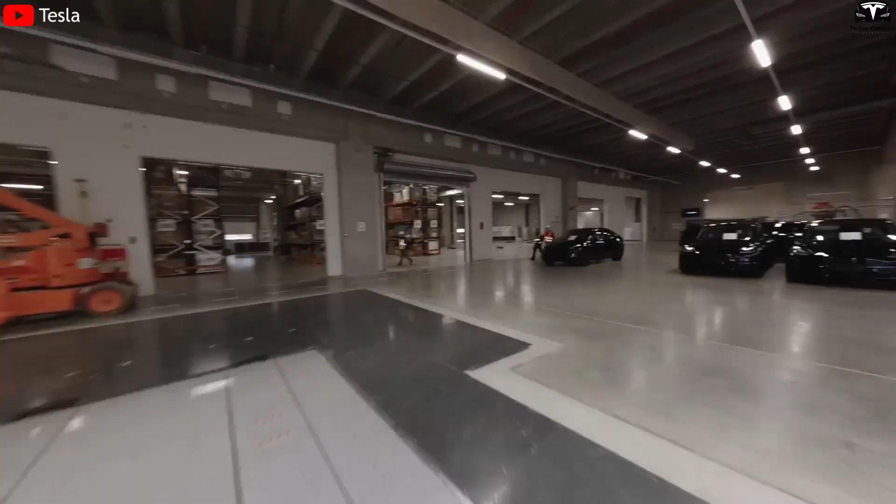Tesla also has a superior advantage in large-scale production capabilities, a critical factor in reducing costs and optimizing the manufacturing process. The company has demonstrated its ability to mass-produce products like electric vehicles and batteries, and this will continue to be applied to the production of Optimus robots.

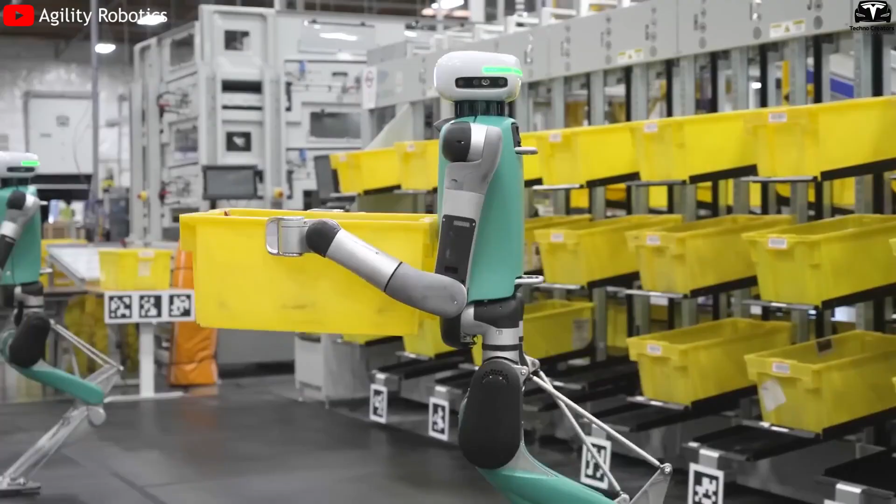Elon Musk has stated that Optimus could be sold for under $20,000, a price significantly lower than current robots, thanks to the reuse of core technologies from electric vehicles and the optimization of the production process. This not only helps Tesla reduce costs, but also makes the robot more accessible and capable of mass production, thereby meeting large and diverse market demands.

Furthermore, Elon Musk has also emphasized that Optimus will change the global labor economy. He believes that in the future, physical work will be a choice, meaning manual labor will no longer be mandatory, and people will be able to focus on creative or intellectual work while Optimus performs physical tasks.

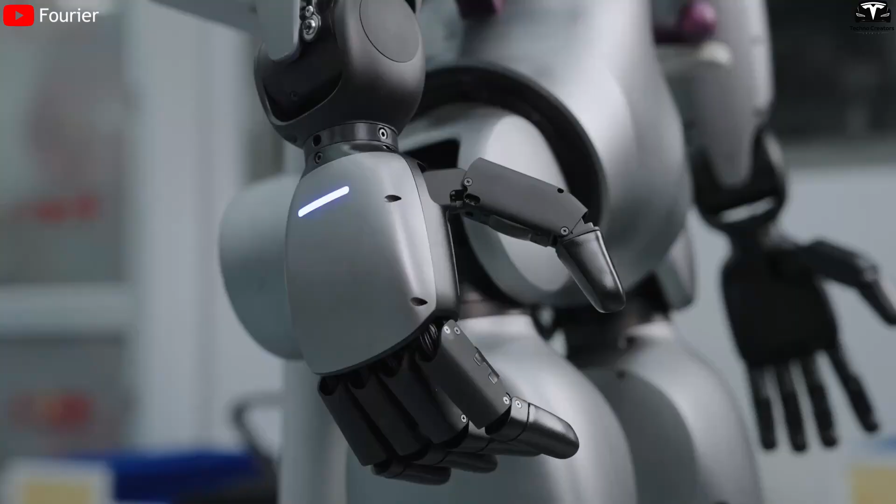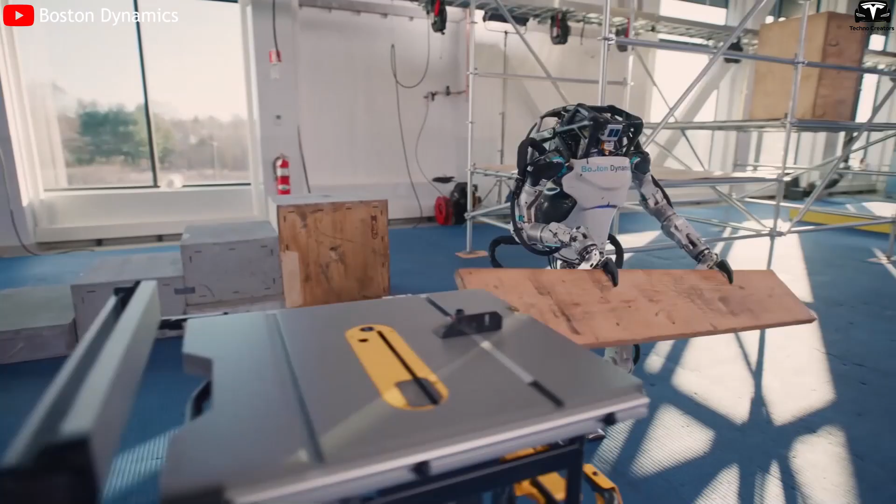Although Tesla is pioneering the humanoid robot field with Optimus, the company will still face fierce competition from major players in the robotics and technology industries. One notable competitor is Boston Dynamics, a company prominent in the development of mobile robots and humanoid robots. With products like Atlas, a humanoid robot capable of moving flexibly and performing complex tasks, Boston Dynamics has demonstrated its ability to develop advanced robots.

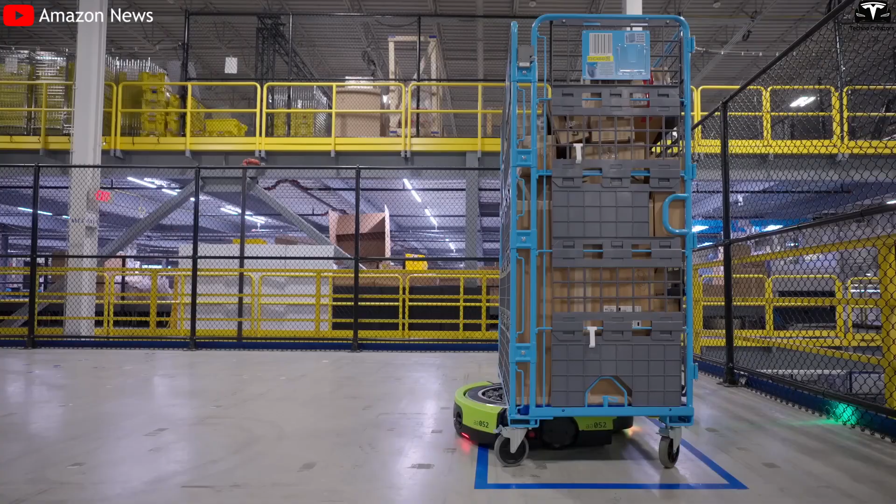However, while Boston Dynamics has superior technology, they have not produced consumer robots with low costs like Tesla's Optimus. Honda is also a potential competitor with Asimo, a humanoid robot capable of moving and performing simple tasks, although Asimo is limited in its ability to self-learn and perform complex tasks. Honda has stopped developing Asimo, but the company still has resources and experience in the robotics field that Tesla needs to monitor.

Amazon, a company not only in retail but also a leader in automation, is also a formidable competitor with innovations like warehouse robots. Although Amazon has not developed a humanoid robot like Optimus, the company possesses a strong research and development team, especially in the field of automated robots and artificial intelligence, which could enable them to quickly enter the humanoid robot market when they see profit potential.

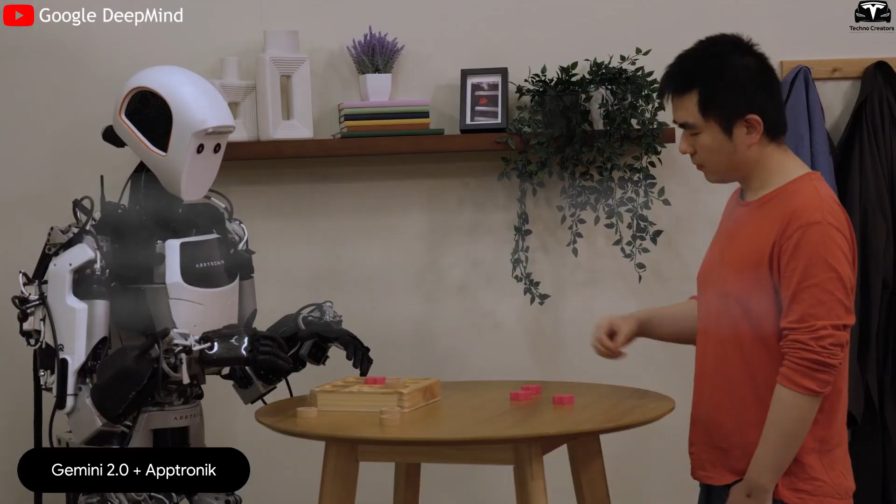Google DeepMind, with significant investments in AI and machine learning, although not yet producing humanoid robots, their AI technology could be applied to develop intelligent humanoid robots. DeepMind, a subsidiary of Google, could become a significant competitor in developing software and technology for humanoid robots.

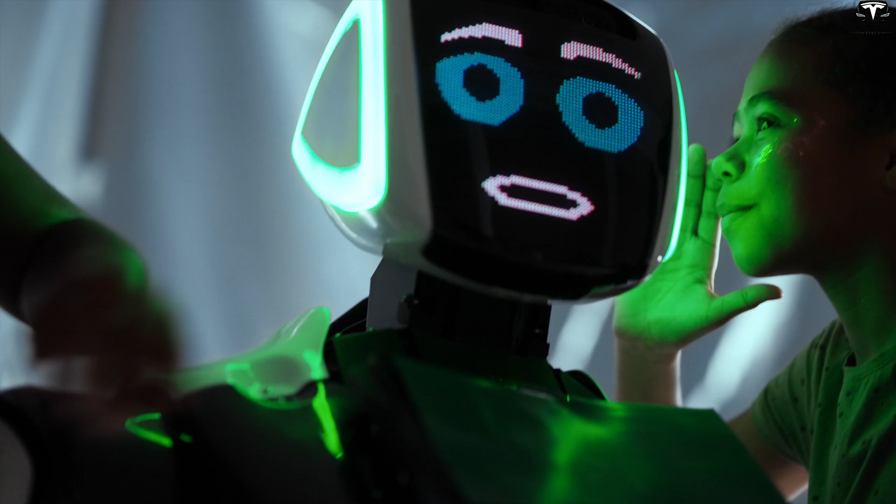Competition between Tesla and these rivals lies not only in technology, but also in price and market accessibility. Tesla, with its large-scale production capabilities and reuse of existing technologies from electric vehicles, can reduce robot prices to an accessible level, helping Optimus achieve broad market reach. However, with strong financial resources and leading research teams, companies like Google and Amazon could quickly enter the market, focusing on optimizing AI and developing robot applications in fields such as healthcare, customer service, and manufacturing.